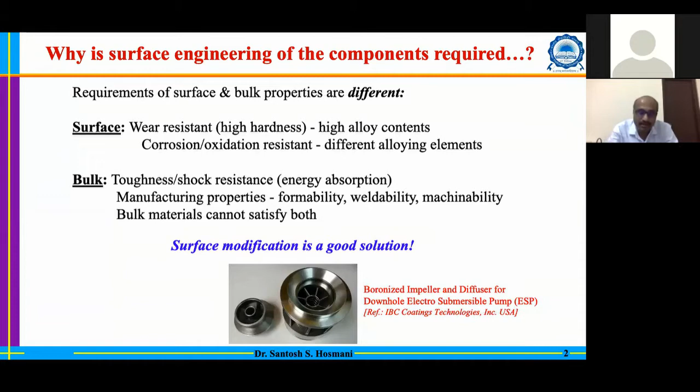At the same time, it may not be economical. Instead, we can start with cheaper material and find a way to change the surface property. That is why surface engineering is becoming very popular, especially nowadays.

There are various types of surface engineering techniques. One broad classification is that we can change the surface microstructure with respect to chemistry, or without chemistry. That is one approach, which we call surface treatment. Another approach is where we deposit a nobler material over the surface, which we call a coating technique.

So the current talk is basically related to surface treatment, where we are going to change the surface chemistry by introducing boron into the surface.

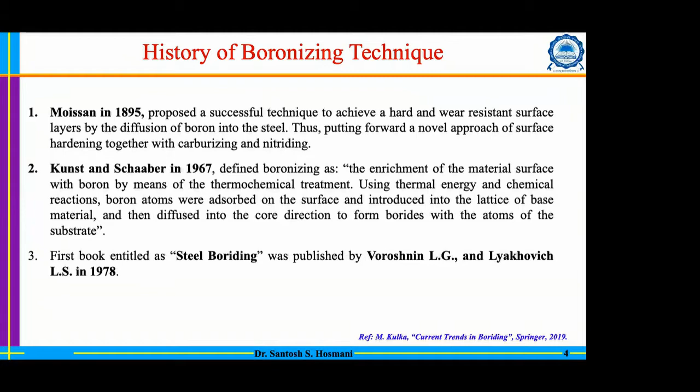The boronizing technique is quite old. The idea of boronizing was first proposed back in 1895, along with nitriding and carburizing. Since then, the science behind this process slowly gained sufficient understanding, and by the end of 1967 there was enough understanding about this process. Subsequently, there are many publications even till today in this area. However, the first book on boronizing of steel was published back in 1978, and since then we have plenty of literature available in this area.

Similar to carburizing and nitriding, boronizing can be done in various ways. One option is to use a solid medium, where due to elevated temperature some reactions occur that generate boronizing potential. That boronizing potential is useful to introduce boron into the steel surface, and not only steel, but even non-ferrous materials.

The solid media process is also called powder pack boronizing, which is very popular because of its low cost. Other options available include liquid media, though some environmental issues are associated with that, and gaseous media is also used for boronizing.

Other techniques like laser, plasma, ion implantation, and glow discharge are also available. People have explored these, and successful boronizing has been achieved using them.

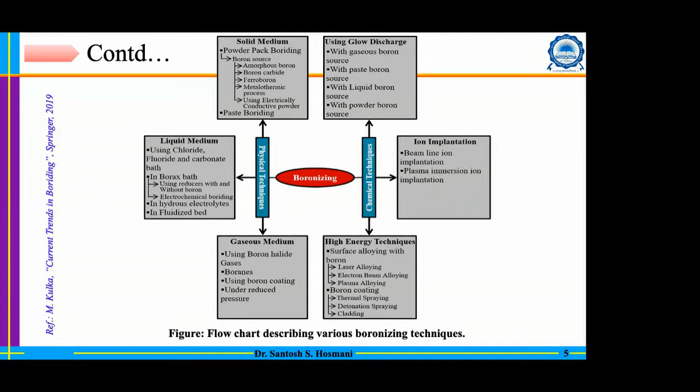However, pack boronizing is quite popular, and various industries are basically in the boronizing business. This business can be associated with supply of raw material, or industries that actually provide boronizing of various components. For example, from India there are a few companies, and across the globe also there are various companies involved in this boronizing business.

Now you must be wondering what materials can be boronized. In principle, you can boronize ferrous alloys as well as non-ferrous alloys. In ferrous alloys, basically all types of steels, even cast irons, can be boronized successfully. In non-ferrous materials, nickel-based superalloys are also boronized successfully, as well as cobalt-based alloys and titanium alloys.

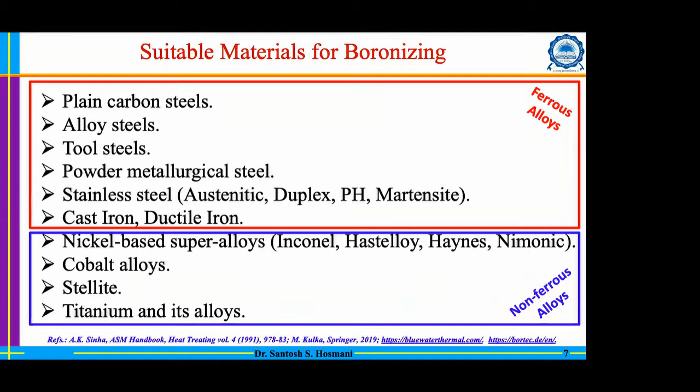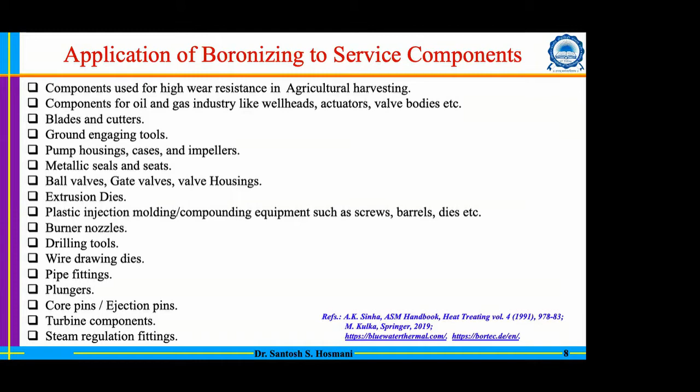From an application point of view, there are various components involved, mostly associated with agricultural harvesting related components, even oil and gas industry related components, blades, cutters, cutting tools, and dies and extrusion dies. So plenty of components can actually be subjected to boronizing, and these are just a few examples for your imagination.

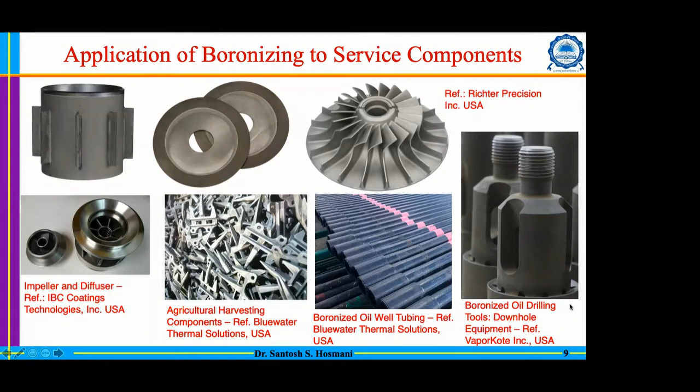These components have been successfully boronized as claimed by various companies mentioned here. You can see the impeller, diffuser, agriculture harvesting components, as well as boronized oil well tubing and drilling tools. These have all been successfully boronized, and people are using this technology widely.

In fact, the VaporKote industry has claimed that boronizing is a perfect solution, especially because it helps limit wear and tear wherever friction related issues are present, and it has very good resistivity to soil acidity, and it actually stops the redox reaction at the metal surface. That's why the boronized surface is quite suitable for that purpose.

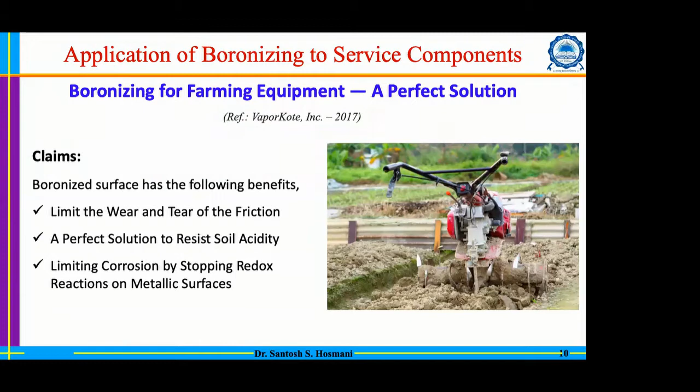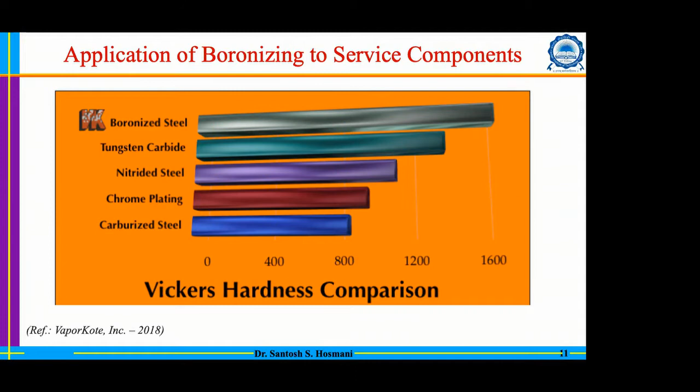The good thing is that whatever boronized layer forms on the steel surface, it will not be immediately detached from the surface, even though it is very hard. That is associated with some properties linked with that particular material, which I briefly explained during the presentation.

Now the boronizing, as you have already guessed, is basically a thermochemical treatment driven by temperature, and we need to have some kind of boron source there. That boron source will introduce sufficient boronizing potential, and then the boron will be introduced. Fundamentally we need to understand the iron-boron phase diagram, and unlike the iron-carbon and iron-nitrogen phase diagrams, the iron-boron phase diagram looks entirely different.

In case of the iron-nitrogen and iron-carbon system, you have sufficient solubility for nitrogen and carbon in austenite, but that is not the case for boron. If you see the solubility of boron in ferrite as well as austenite, it is extremely poor.

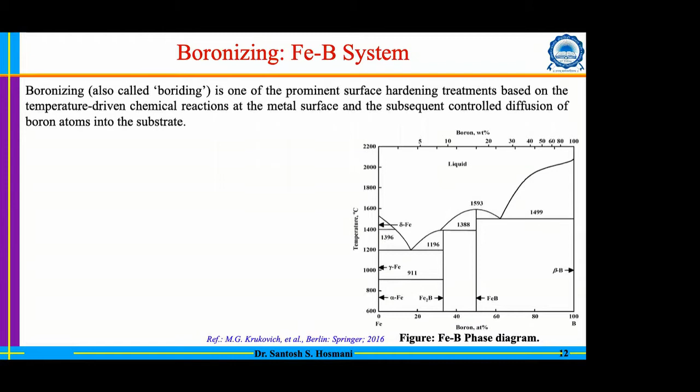However, there is a possibility of formation of iron borides, and two types of iron borides are generally formed: Fe-B and Fe2B. From the composition and stoichiometry itself, you must have guessed that the Fe-B layer will form at the top, and then subsequently the Fe2B layer will be there, followed by the non-boronized core.

Now, what are the properties which we need to understand? Because there is always a question whether it is better to have a single boride or single-phase boride layer, or a two-phase boride layer. To answer that, you need to understand especially the physical properties associated with this.

With respect to composition, whenever the boron content in steel exceeds roughly 9 weight%, there will be formation of the Fe2B phase. And whenever the concentration of boron exceeds about 16 weight%, there will be formation of the Fe-B layer.

If you see the crystal structure, Fe2B has a BCT structure, that is a tetragonal structure, and Fe-B has an orthorhombic structure. Their lattice parameters are entirely different from the lattice parameter of ferrite as well as austenite.

The lattice parameter for ferrite is roughly 0.28 nanometers, or in angstroms, 2.8. And in case of the FCC, it will be about roughly 3.5 something. So if you compare these lattice parameters with respect to Fe2B and Fe-B, they are entirely different. But still, this layer is quite intact during the formation process.

If you see density-wise, Fe2B is denser compared to Fe-B. And hardness-wise, both are having almost the same hardness, roughly about 20 GPa. Young's modulus is significantly different, and Fe-B is quite stiff compared to Fe2B.

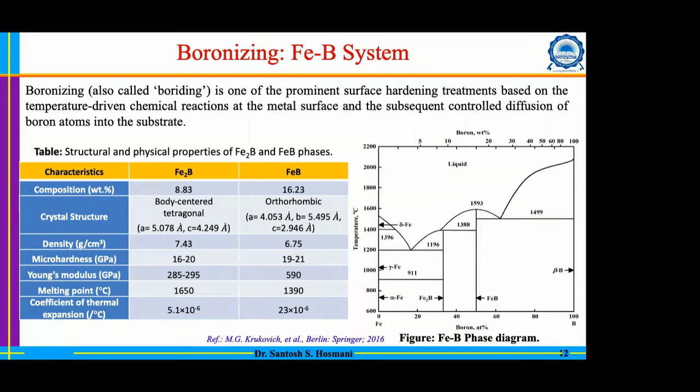Now another fundamental thing is that we need to understand the diffusion or migration of boron in both types of lattice, whether the open BCC structure or the close-packed FCC austenite structure. Similar to diffusion of carbon and nitrogen in ferrite and austenite, the diffusivity of boron in ferrite is relatively faster compared to austenite at a particular temperature, because the activation energy barrier for diffusion is quite high for the FCC matrix compared to the BCC matrix.

This matches well with the phenomena associated with carbon and nitrogen diffusion. Originally this diffusion concept was introduced in 1953, but that equation had some error and was later corrected. In 1995, the equation shown on screen was proposed, and people still use this expression. Importantly, as the temperature increases, especially beyond 600 degrees Celsius, diffusivity is not really much different in the ferrite matrix versus the austenite matrix.

So unlike the carburizing process, there is no requirement that you need to be in the austenitic phase region. In carburizing, we require austenitic phase because we have very high solubility of carbon there. But here that is not the criteria, because we have seen in the phase diagram that solubility is not really great in either phase.

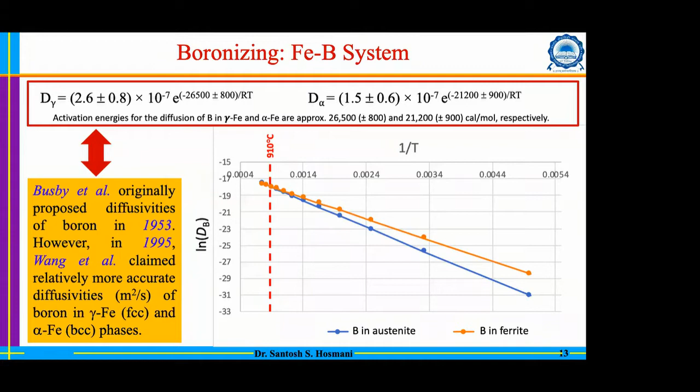So people have successfully boronized even at 800 degrees Celsius, and also boronized pure iron successfully. The only criteria is that high temperature helps us have effective chemical reactions happening at the surface, because these chemical reactions also have their own activation energy barrier. High temperature helps overcome that barrier, so your chemical reaction rate will be faster. That advantage you get due to high temperature along with high diffusivity.

Now I will talk about the pack boronizing method, which is the most economical method. What are the basic contents in that particular powder? There are three types of powders in that mixture: one is the boron source, the second is the activator, and the third is the diluent.

There is a wide range of boron sources available. People have mixed amorphous boron, crystalline boron, borax, even ferroboron. But B4C, boron carbide, is widely used by the commercial powders available, and activators are mostly KBF4, a halide type compound generally used as activator.

The role of the diluent is just to provide an inert atmosphere so that whatever environment is generated is pretty uniform surrounding the specimen surface. That's the role played by the diluent. Mostly people use SiC as the diluent, which is considered inert at boronizing temperature.

However, literature and also our own work observed that especially at elevated temperature, SiC actually forms a sticky layer on the steel surface, and that sticky layer is difficult to remove easily. You probably have to do some grit blasting or something to remove it, adding some additional cost. This happens whenever using very high temperatures, especially beyond 1000 degrees Celsius. Otherwise, SiC has no role in any reaction as such.

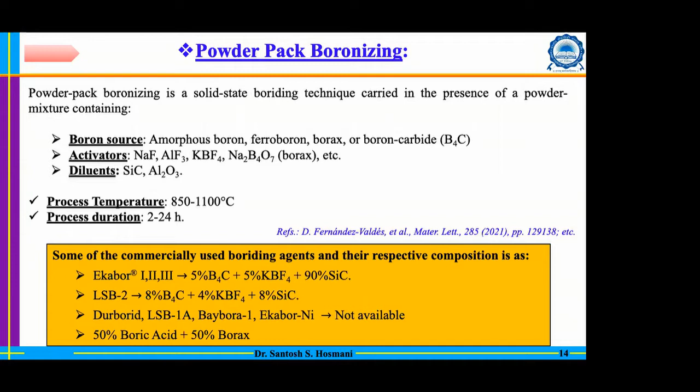Now the experimental setup. The experimental setup is pretty simple. You have the container, and the material for the container ideally is steel. Even you can go with mild steel, and stainless steel containers are also widely used.

Then in that container, you must adopt a particular mixing process. Whatever layer thickness you are putting for the boronizing mixture, followed by the alumina powder or even glass powder, whatever combination you select should be uniform throughout the process. Otherwise, it's very difficult to control the boride layer thickness, and you really cannot predict what will happen in pack boronizing. So you need to adopt a particular sequence.

What we actually used to do in our container: we have about a 20 millimeter layer deposited by this boronizing mixture, and we keep the sample over it. Then again we have a 20 millimeter layer of this boron powder, followed by the alumina powder, even silica, as well as glass powder.

The basic purpose is to avoid any kind of environmental contact with the boronizing mixture, because if you have oxygen trapped into this powder, that will lead to formation of porosities at the specimen surface. That creates a problem especially during application, because if the porous layer is on top, either you have to remove that porous layer or find a way to close those pores. If that is not done, in principle that's a disadvantage because cracking can occur easily, especially at the top layer.

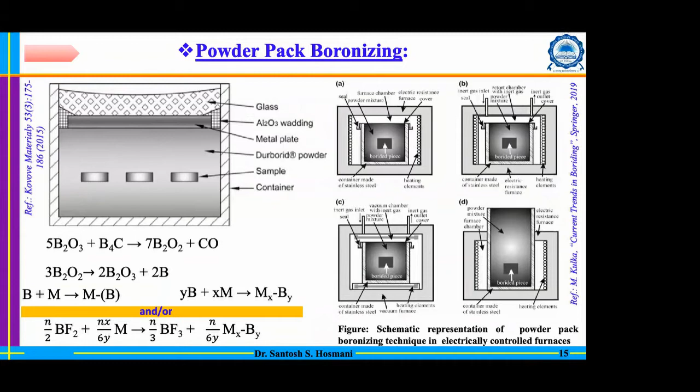Even your container can be a longer container, with only a limited portion exposed to elevated temperature. For example, with a shaft type component, only a limited region of that shaft may need boronizing. This is possible because chemical reactions occur wherever the temperature is sufficiently high, and only then will boron potential be generated; otherwise it will not be generated. This means a selected region can also be successfully boronized in this pack method. You just have to alter the design accordingly.

So now there are well-known 5 to 6 steps in this boronizing process in the physicochemical model.

You have the free boron coming from the atmosphere, and this boron potential depends on a lot of factors. One is the chemistry or composition of your boron mixture, as well as the temperature. Then there is adsorption of boron, and that adsorbed boron will react and form FeB and Fe2B. Now the formation of FeB and Fe2B depends upon the capability of the atmosphere.

If the boron potential is high, then there will be formation of FeB, otherwise it will not lead to formation of FeB, and you have only Fe2B. Then there is migration of boron across the interface of boron and compound layer, and finally these borides will grow. The growth morphology also depends on the crystal structure of these borides, which I will discuss later.

As you know, initially there is formation of Fe2B. Then subsequently, at a later stage of boronizing at the surface, there is consumption of Fe2B, and that leads to the formation of FeB. Obviously the system wants to grow both layers together, meaning FeB layer will grow together with the growth of Fe2B layer.

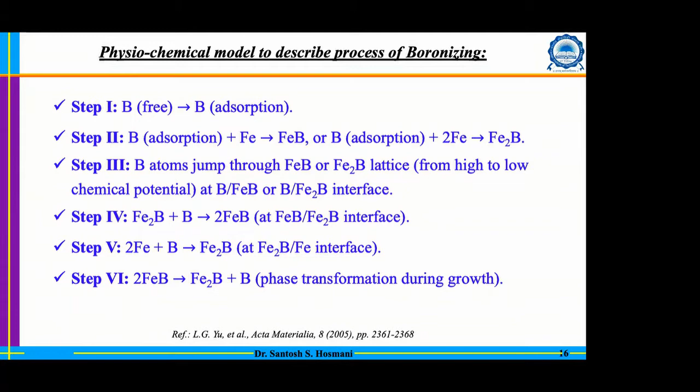That means at the surface, to achieve equilibrium between these two compounds, there is a possibility of some dissolution of FeB to Fe2B, or vice versa, Fe2B into FeB. So those reactions can occur at the surface during growth. This is the simple mechanism that people have proposed, and this is from our work.

What actually happens is initially there is formation of a compound which is boron rich, and that compound is neither FeB nor Fe2B. It is just a boron rich compound, and then there is nucleation of Fe2B, and it grows as a sawtooth morphology.

Again, that morphology depends on the composition of the steel. If you have low alloy steel or medium alloy steel, most of the time you have a sawtooth morphology of these borides, as people have observed. However, as you keep increasing the concentration of alloying element, your morphology will change. It will become a more smooth morphology than the sawtooth morphology. I will discuss that later, because it is also an interesting aspect we need to understand.

Then subsequently, you can see there is some transition zone shown here. What exactly is a transition zone? Whatever alloying elements are present in the steel, not all will be accommodated into iron boride. Some elements have limited solubility in iron boride, and some elements do not have any solubility at all, meaning they are entirely rejected by these borides and accumulate at the front of the borides, forming a transition zone.

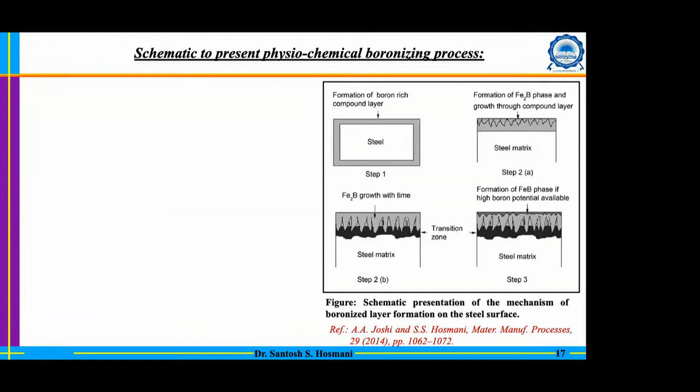Many times that transition zone will alter the mechanical property, and that alteration may be disadvantageous, so we need to understand that transition zone concept, which we will discuss later. Finally, you have simultaneous growth of three important layers: the transition zone, Fe2B, and FeB. That is the typical cross section.

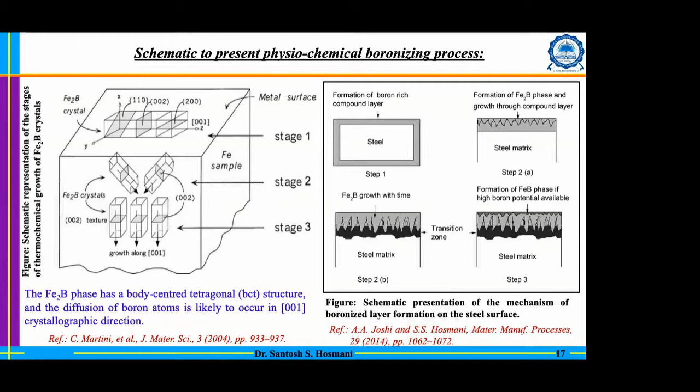Now why is this sawtooth morphology observed? What people propose is that Fe2B has a tetragonal structure, and boron diffusion generally prefers to migrate, or the boride prefers to migrate, along the 001 direction by stacking the planes of 100 and 110. So these planes stack in the 001 direction, and because of that we get the sawtooth type of morphology observed in most cases of steel.

Now, as I mentioned previously, why we don't want to have two layers together - here is an example. They have studied AISI 304 steel, and you can clearly see in the microstructure there is formation of Fe2B as well as FeB. Looking at the nanoindentation study, they mention the hardness profile as well as the residual stress profile.

Here you can see figure E, the residual stress profile - let me just use a laser pointer. So in the residual stress profile, you can see that...

So here you have the tensile nature, especially in the FeB layer, that is the top layer. Top layer FeB has a tensile nature, and Fe2B has a compressive residual stress. Now this tensile nature is definitely not desired, because that can easily initiate cracking. And since these two layers have different crystal structures, the coefficient of thermal expansion is also different, so there will most likely be very weak adhesion between the FeB and Fe2B layer. That means there is a possibility that the FeB will be detached during operation.

The nature of this stress is very much dependent on process parameters. Here they studied at a constant temperature at different times. Initially, when time was quite less, at 2 hours, the FeB layer had almost a compressive residual stress. However, as time progresses to 10 hours, that residual stress nature changes from compressive to tensile. This happens because of the growth of the boride layer, and there's a difference in their crystal structure. Ultimately, that will enable it to withstand the stress generated simultaneously in the FeB and Fe2B layers.

The properties of the FeB and Fe2B layer depend on the elastic strain - that is, the capability of that boride layer to accommodate the elastic strain generated due to residual stress mismatch. Because whenever there is formation of the Fe2B layer on the substrate, which will be ferritic or austenitic during boronizing, there is a lattice parameter difference. But Fe2B has some flexibility, and the elastic strain is sufficiently high there, so whatever mismatch exists, the system is able to accommodate it. That's why very good adhesion of the Fe2B layer is observed, especially in case of boronized steel.

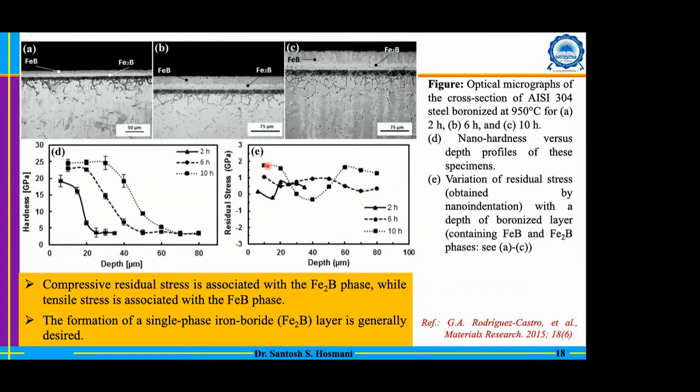Now another important aspect is the composition of the ferrous alloy. This is a very complicated concept, especially in boronizing, which is least understood. During boronizing of ferrous alloys, various compounds and elements have a different response. For example, elements like chromium, aluminum, silicon restrict boride growth. However, elements like cobalt, nickel, manganese don't have much effect on restricting boride growth. This restriction is basically associated with mostly the binary system. But in reality, with the presence of multiple components, the behavior of these elements becomes entirely complicated and may not behave as shown here. Broadly speaking, carbon, silicon, aluminum, chromium restrict boride growth, while manganese, cobalt, nickel don't have much effect on boride growth.

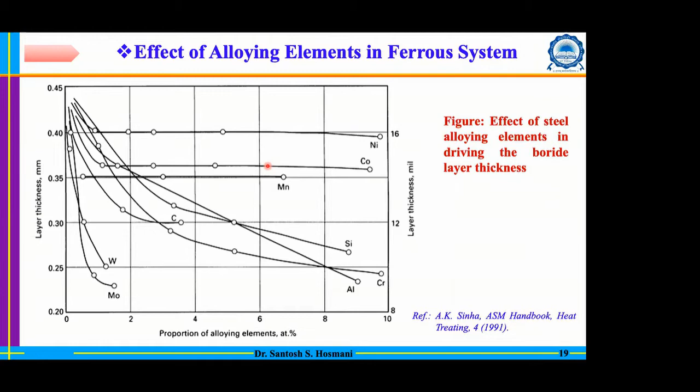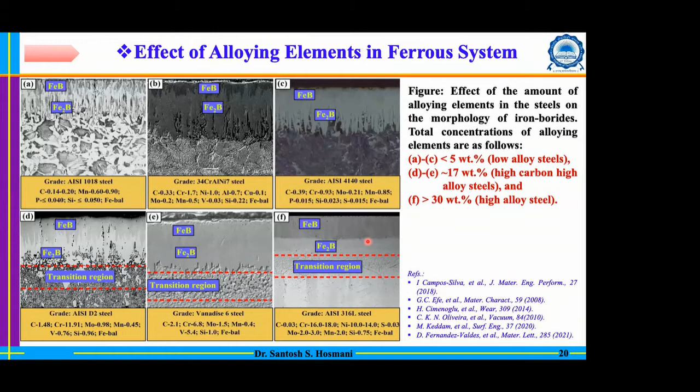You can see the interface between Fe2B and the transition zone, as well as FeB and Fe2B, is quite smooth in nature. That means the morphology of these borides is significantly dependent on the concentration of the alloying element, apart from its effect on the migration behavior of these borides. These two important effects basically govern the morphology of these iron borides.

This is ultimately very important, especially with respect to the mechanical properties of this layer, so I will quickly discuss it. We need to understand the microstructural aspect and the role of these alloying elements during the growth of these borides. That was our main motivation for the study. So what actually did we study here?

We started working on this topic in 2013 and extensively did a lot of experiments, varying the container as well as the boronizing parameters like temperature, time, everything. We got some interesting results there, which we will show initially.

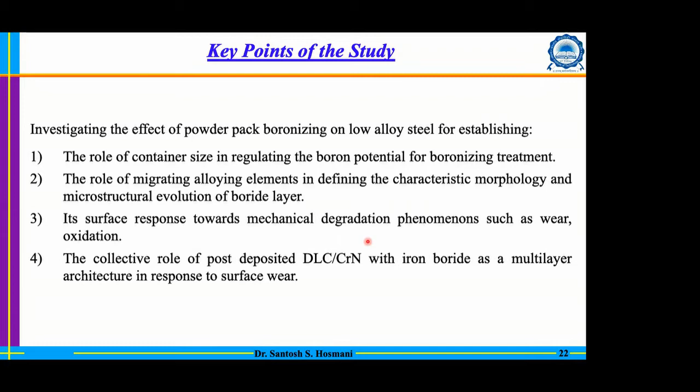Then we will slowly migrate to the more scientific aspects related to the migration of the alloying element - a typically complicated aspect which we proposed during our study. Finally, we talk about the mechanical aspects using various techniques, including oxidation and wear, and then whatever lacunas are associated with boronizing, how we can tackle that using duplex treatment, like a post-treatment. So that we will discuss quickly.

Now, the pack boronizing process optimization has been done, and in process optimization, I will show basically two types of steels we have used: one is AISI 4140 and the EN41B steel.

We have performed experiments at different conditions. Our main intention is that these two steels have wide applications, and these elements' concentration is quite less in this particular steel. We want to understand this material more in depth, so that's why we selected these two alloys here.

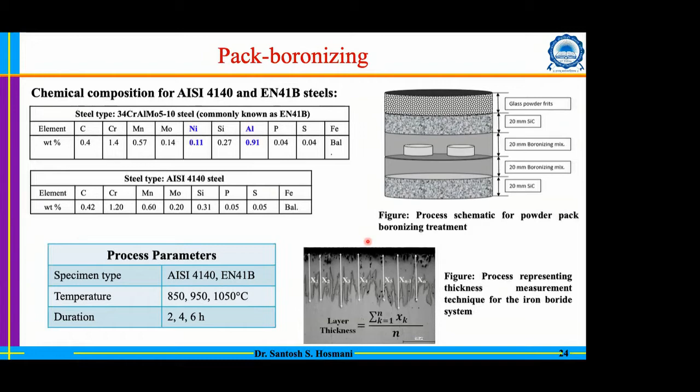These are basically the literatures we'll find on this topic. And here, as I mentioned earlier, we initially used three different types of containers: a small container, medium sized container, and large container.

The material of the container is steel - it can be stainless steel or even mild steel. You have to remember that during boronizing, your container will also consume the boron potential which is generated, and you have to take care of that most of the time. That's why people used to pre-treat the container itself first, so that the consumption of boron potential by the container will be minimum. However, some consumption will always be there.

Here you can see the effect: in case of a small container, boron potential will definitely be limited because the quantity of powder is less there. In this case, we have not found any kind of boride layer as such. This layer is something like dominated by a porous layer which forms there, and there is no boride layer in figure A.

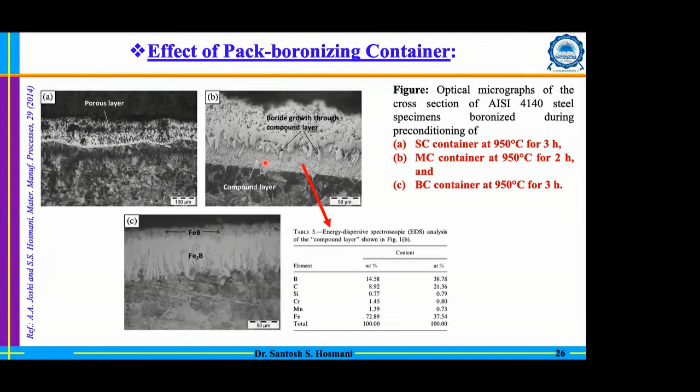In figure B, we have about 2 hours, temperature same in all cases. There we have seen compound layer formation, and by using EDS chemical analysis, it shows very high boron as well as carbon content there - that rich content is there. The hardness value shows a slight increase: core has about 300 HV hardness, and this compound layer has about 400 HV hardness. But this is not really the boride layer, because boride layer typically has hardness greater than 1200 HV. So that is not really the category of boride, but a compound layer forming initially.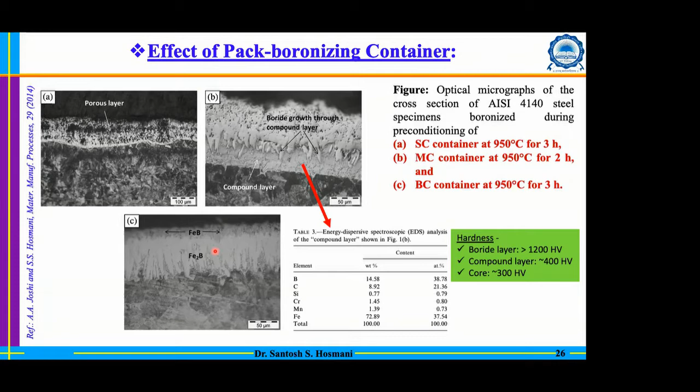Here you can see the sawtooth morphology actually emerging in this compound layer. As you keep increasing the time, and use a bigger container where boron potential is also high, you can get the well-grown FeB layer as well as Fe2B layer. That means your container size and the amount of powder with respect to the surface area of your material component is also very vital in governing the kinetics of your process. So that is also something we need to understand.

And here is another interesting thing: in case of a medium container, we are not seeing any kind of FeB layer formation.

We were curious to understand what exactly this transition zone is, so we did some investigation. We realized that this transition region is basically associated with enriched elements which are rejected by the boride, and these are forming undesired compounds in the transition region. Because of that, this particular region has a different property than the matrix as well as the compound layer.

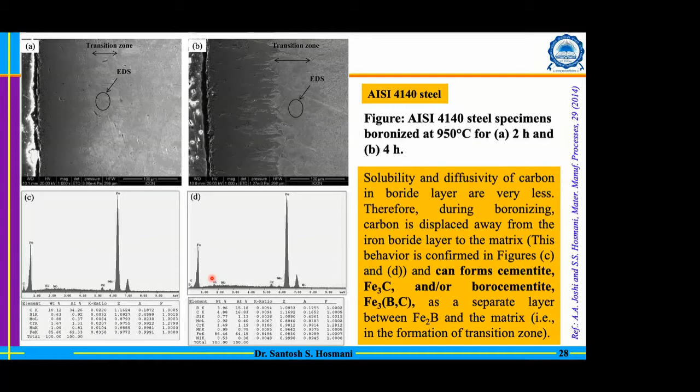In this case, we have observed enrichment with respect to carbon, and we also have indication of boron there. That means there is a possibility of formation of cementite, or borocementite. Because of that, the properties are different compared to the matrix as well as the boronized layer. So now the basic mechanism is very clear to understand for us, and this is what I already explained.

The nature of the transition zone is basically rejected elements. In this case, we observe carbon, however, other elements are also there.

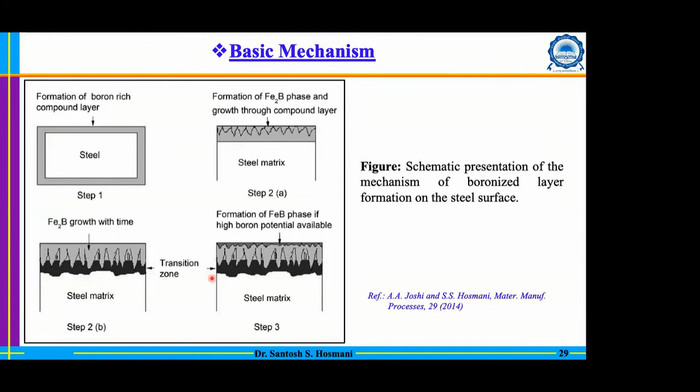At that time, in 2014, this paper was published, and we were unable to have much characterization there, so we were unable to understand this particular concept in more detail. Later on, we focused more on understanding this.

We selected another category of low alloy steel, the EN41B steel, and did experiments at various temperatures and durations, then subsequently investigated this.

Now, in this case, the optical micrographs show an interesting phenomenon. All are taken at the same magnification except figure B, and all are exposed to 4 hours of boronizing, only temperature is different. If you notice, at a low temperature of 850 degrees Celsius, the boride morphology,

if you compare figure B, which is an amplified view of figure A, with figure D, you can see there is a significant difference in their appearance. In case of figure B, the borides are very thin in nature and very sharp in appearance.

However, at very high temperature, 1050 degrees Celsius, these borides are not really very sharp, their tips are blunted. And if you go to the lower temperature, 950 degrees Celsius, the tips are very sharp again. That means the boride morphology is significantly dependent on temperature.

And this particular phenomenon, you can also see surrounding the boride, there is some kind of different contrast appearing, different from the matrix. And why is that contrast there? That is because of the different chemistry of that particular region.

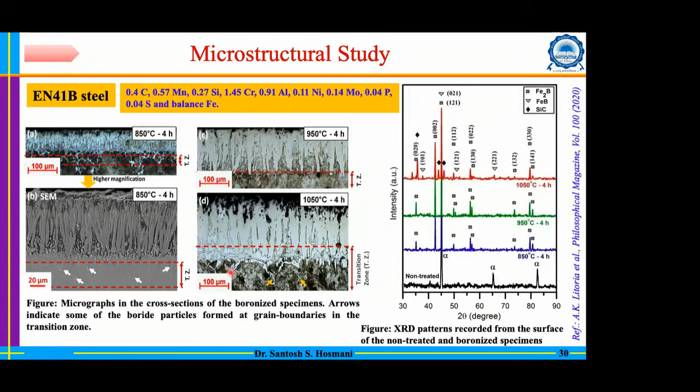We call this particular region the matrix. So we have used the word boride columns, then the matrix, then the transition zone region, and then the core region. These are the terminologies we have used in this particular case.

So now, before delaying much, I will just go to this particular hardness depth profile. You can see that the hardness depth profile is significantly lower for the case of 850 degrees Celsius compared to that of 1050 degrees Celsius.

You may be wondering, because in case of 850 and 1050 degrees Celsius, both cases we are getting the iron boride compound, but why are the properties different? Actually, if you notice carefully, at very high magnification, there are open gaps, especially look at figure number B.

These open gaps are nothing but the matrix, meaning that region has not been transformed to boride yet. You can even see this matrix there even up to the surface. That means you still have a trapped matrix region which is unable to transform into boride entirely, and this situation is aggravated, with the proportion of matrix increased, at a lower temperature.

That's why whenever we take an indentation, you're getting information from boride as well as from the matrix. That's why you're getting very low hardness or least hardness at 850 degrees Celsius. However, at elevated temperatures, the matrix region is entirely consumed by the boride, so that region will have only boride. That's why during micro hardness measurement, you're getting information only from the boride, and that's why your hardness is very high there.

So in principle, bottom line is that you have a mixture of the boride as well as matrix, and we use the fraction of boride and fraction of matrix, which equals 1. That simple concept we have adopted here from this particular slide.

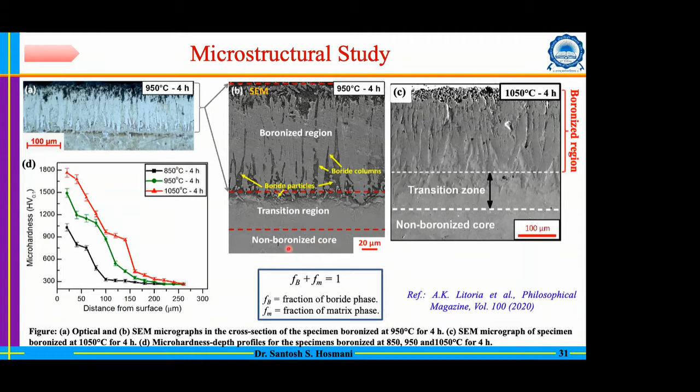So you just imagine the process from the core to the surface. In the next sequence also, I will imagine this in the opposite sequence. Whenever I show the chemistry of this region, there also we are imagining from the opposite sequence.

Now here you can see an enlarged view. You can see that the bigger size boride columns are formed by clustering of thin boride columns, which happens during the growth process. And you can still have some trapped region, which is the matrix region. You also have the formation of defects, especially near the surface region, and these defects are mostly porosities.

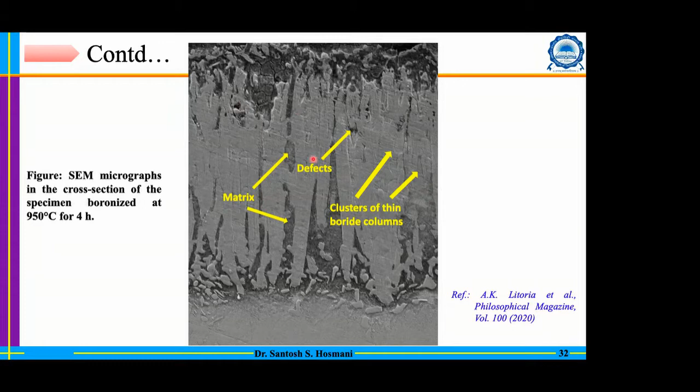Now the EBSD, that is electron backscatter diffraction, helps us to understand the orientation of phases as well as which phases are forming there. And we have confirmed that basically you have the stacking of 100 and 110 planes in the direction of the 001 crystallographic direction. So that is pretty well confirmed here.

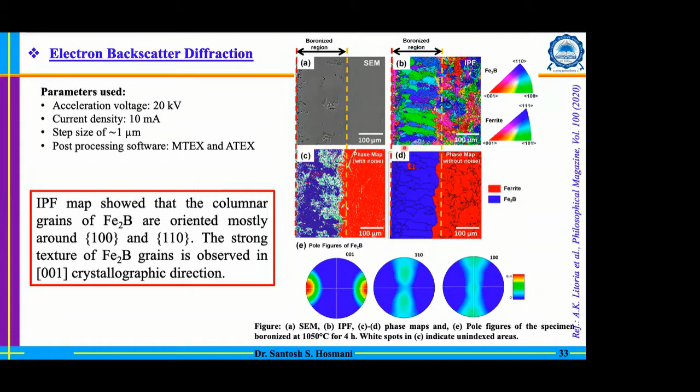And apart from that, you can see in this particular region, near the surface, you have very fine grains visible, and then subsequently there are columnar grains visible. That means in this boride region, you have two important regions: the small grains and the columnar grains. And then subsequently we have a transition zone, and then you have the core.

And why are those fine grains forming there? Most likely, whatever matrix is left between the two boride columns is transformed at a later stage into tiny boride, but they are unable to grow because they are already restricted by the well-grown boride columns. So that's why they remain as very fine grains there.

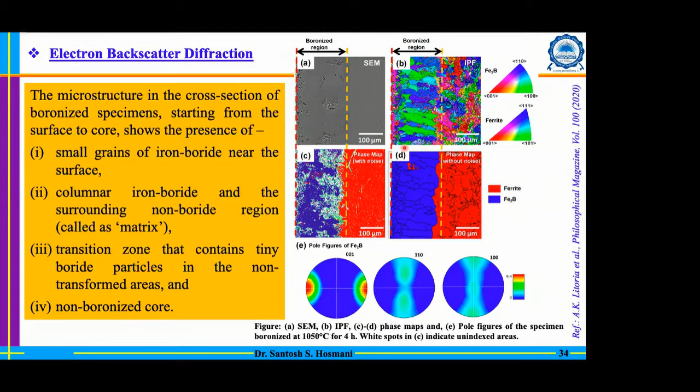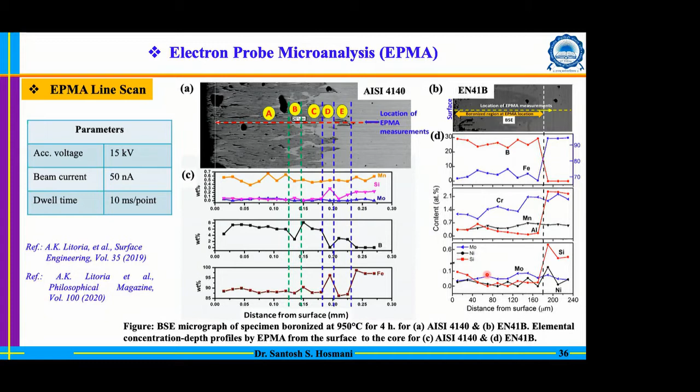However, other elements like chromium, manganese, even molybdenum and nickel, have some solubility in boride, but that solubility is not the same as in the matrix. That means during the growth of boride, elements will be rejected—that is for sure. All elements will be rejected to some extent; some elements will be accommodated into the iron boride, however some elements are entirely rejected, like aluminum, silicon, and carbon. However, other elements will be accommodated to some extent, but some portion is also rejected.

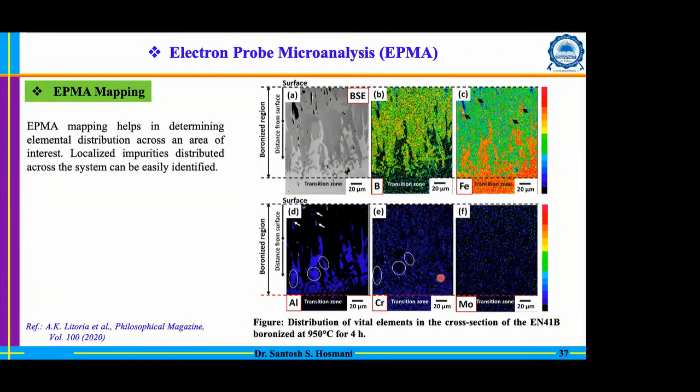For that purpose, we have investigated the glow discharge optical emission spectroscopy, that is GDOES. I will not go into detail because this is a very complicated analysis we did. What I want to mention is that the left-hand side image is for 950 degrees Celsius, and the right-hand side result is for 850 degrees Celsius, both at a constant boronizing duration.

Here you can see that this entire region is divided into different zones, and if you compare them, the nature of these zones appears more or less the same. That means it's not just by accident we got this particular profile; the system is really following some kind of mechanism here, and that mechanism is consistent. I will also show you different durations, and there too it follows a similar trend. That means something is happening with respect to the migration of the elements and the growth of this particular boride, and we need to understand that.

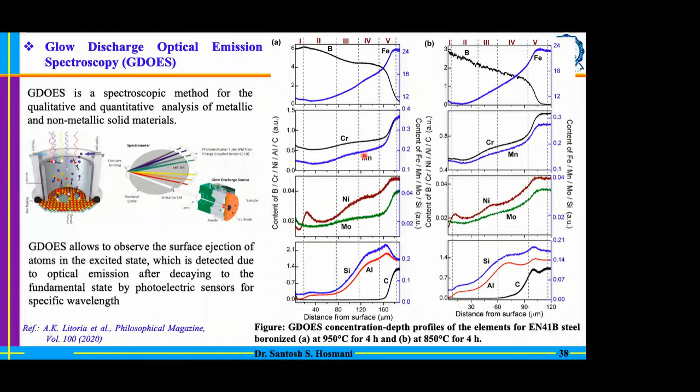For that purpose, we took the slope of this particular profile and wanted to understand how the slope varies. Here is the slope variation. For the boron profile, look from V to I, that means from core to surface. There is a decrease in the slope, and then it again migrates toward zero slope. That tendency is there, and it is aggravated at elevated temperature, that is 950 degrees Celsius.

What does zero slope mean? It means there is a stagnation of the boride column, it is unable to grow further. Why is that stagnation there? That is because of the accumulation. If you compare the boundary line between zone 3 and zone 5 with respect to aluminum and silicon, you realize that something is associated with aluminum and silicon segregation in the matrix, and that was also confirmed in this particular analysis.

For that purpose, we took a mathematical interpretation. The simple interpretation says: you have a total concentration of an element at any depth, which is basically a combination of the chemistry of the boride as well as the chemistry of the matrix, along with the fraction of boride and fraction of matrix. A simple lever rule has been applied here. We interpreted this phenomena, and the outcome is that during boride growth, there are two categories of elements. Some elements are entirely rejected, I call them set number 2, and the elements which are accommodated into the boride, I call that set number 1.

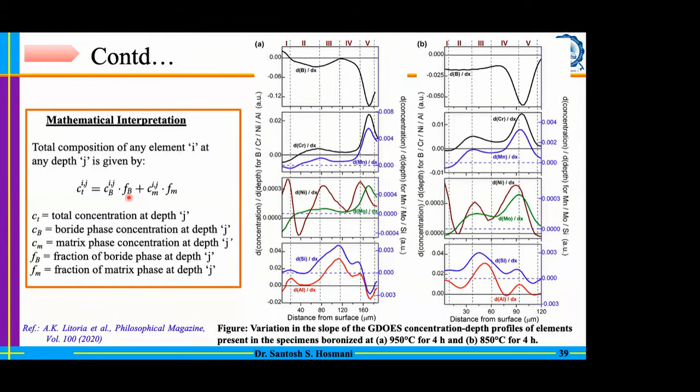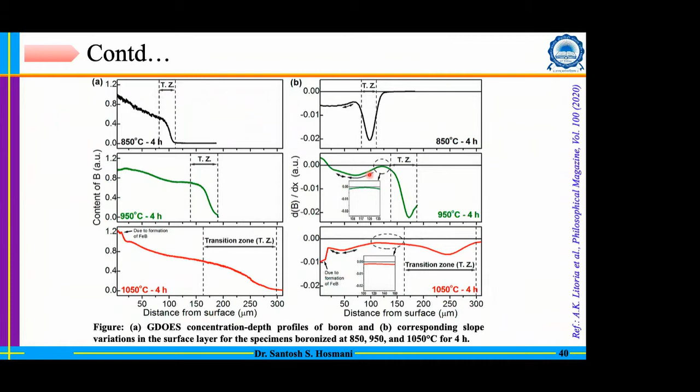In case of aluminum and silicon, you have two types of migration: one in front of the boride, the sawtooth boride, and one between the borides, that means in the matrix. The migration kinetics in front of the boride is less severe, it is able to migrate at a fast rate. However, the elements accumulated between the boride columns are unable to migrate at a faster rate, and that is causing the restriction in the growth of this boride layer laterally.

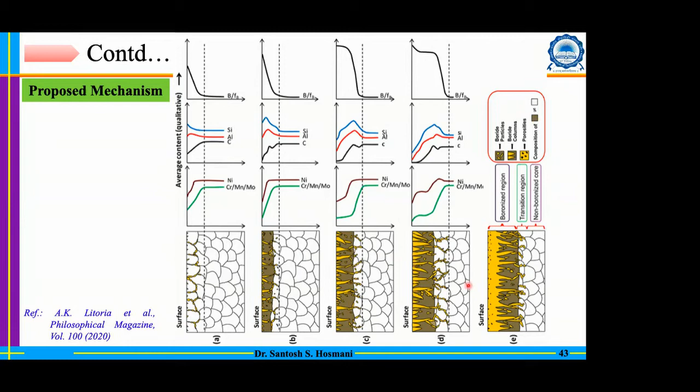So now we have refined our understanding with respect to the mechanism, and we have proposed the matured mechanism here, correlating the migration of elements with the nucleation and growth of the boride. Figures A to E show how this phenomenon happens during boronizing. Initially at the grain boundary there is boride formation, and growth happens in a columnar fashion. During that, rejection of elements happens, which changes the chemistry of the matrix. You can see a grayish region here compared to the non-boronized core. Then finally you have the simultaneous growth of the transition zone as well as the boride columns, that is how the layer matures.

Okay, so now let me check how much time I'm having, depending on that I will decide what rate I have to finish. How much time can I have? Ten more minutes. Oh yeah, sure.

Okay, so now we need to understand the properties. For this we recently did an investigation using nanomechanical study. Why did we adopt nanomechanical testing? Because with nanomechanical methods we can get a localized understanding of properties, which is crucial because let's say your boronized component is subjected to wear. Whenever wear happens, material loss will occur, and fresh material will be exposed. That means the properties of that region are entirely different than the previous situation. So we need to understand the local distribution of these different phases and their chemistry, and how that plays a role in the localized mechanical properties.

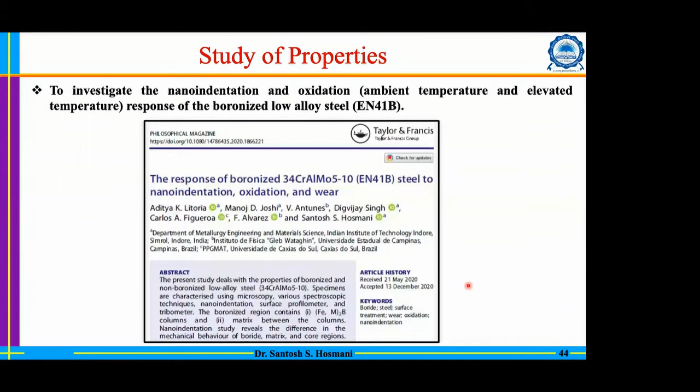For that purpose we did a nano indentation study. What we observed is that borides are definitely harder, which is well reflected in the table here, and the modulus of this boride is basically high, which is obviously expected. Compared to the matrix, that is the region surrounding the boride, and the core region, that is the non-boronized core, the E value, the modulus of elasticity, is definitely high for the boride, which is obvious.

Now the question arises, if the material is very stiff, there is a possibility of cracking during growth. Fortunately, if you look at another column here, the H by E ratio, this gives us information about the elastic strain. Even the HF by H max is linked with that. You can see that the elastic strain, the H by E ratio, is very high compared to the matrix and even compared to the core.

That means even though that boride is stiffer, it still has a capability to absorb any kind of lattice mismatch elastically. That's why if you look at the adhesion test, it confirms that this boride has very good adhesion. So there is no issue of cracking or detachment of this boride during application. That is unlikely to happen. That is the best information we got.

And the matrix has definitely different properties, because of segregation of elements. Whenever there is loss of material and fresh material is exposed to the surface, your surface has the boride as well as matrix, which have different properties. Even though some regions appear boride-free, their properties will still be different because of segregation of elements. Depending on the chemistry of your alloy, you will have different properties of this matrix, and the response during application will also be different.

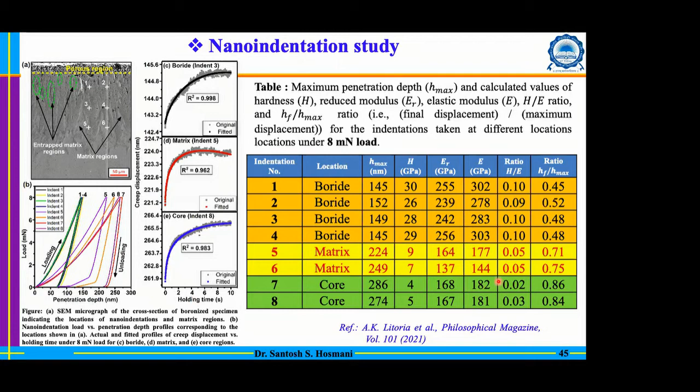Why is strain rate sensitivity useful for us? During application, we may have different sliding speeds — sometimes slow, sometimes faster. Higher the strain rate sensitivity, there is a possibility that the rise in hardness due to strain hardening phenomena will be there, and that helps us improve wear resistance. We have also observed this during our wear study at different sliding speeds. So this high strain rate sensitivity of the boride is advantageous, especially for tribological applications.

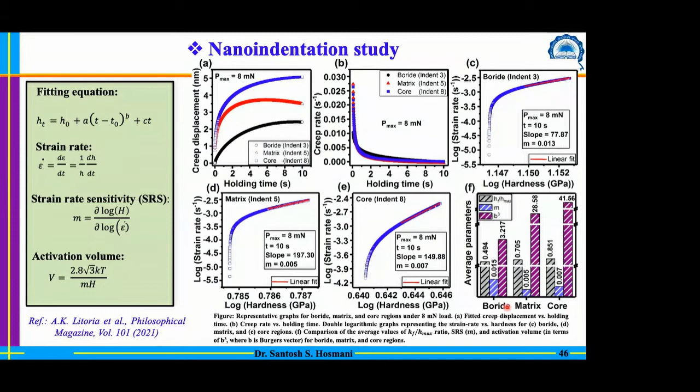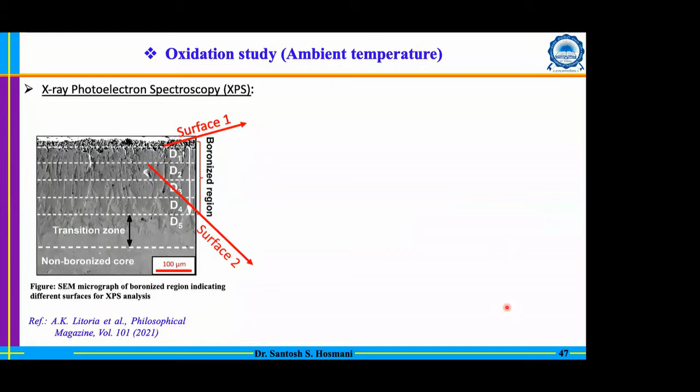Now we also studied the oxidation resistance, removing the layer by layer. We wanted to understand, after deterioration of the surface, how the fresh surface would react with ambient temperature. For that purpose we removed layer by layer and took XPS, X-ray photoelectron spectroscopy. This XPS gives us the chemical information of the elements at different depths, helping us understand how the oxidation response occurred.

Your oxygen level at the surface increases — meaning more oxides are forming at the surface because of less quantity of boride. That is obvious because iron is already bonded with boron near the surface, so less iron is available in the matrix to react with oxygen. That's why we have fewer oxides at the surface, but as you go interior, more oxidation happens. This means the boride has very good resistance to oxidation even at room temperature. That is confirmed from this.

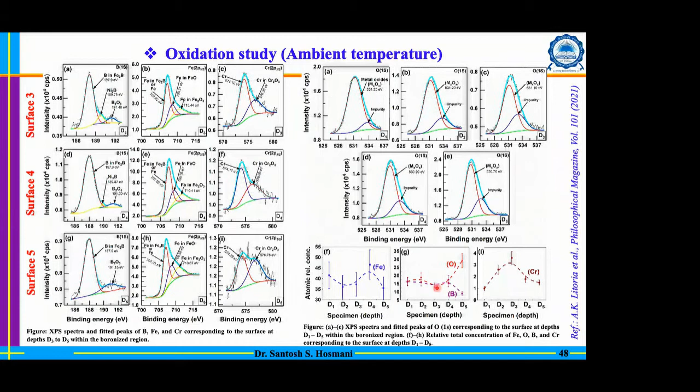Why is that so? Using XRD, we studied this composition and realized that during oxidation, various oxides form. Some of the boron oxides have a lower melting point, so they spread and cover the entire surface. That iron boron oxide, shown in the XRD pattern, uniformly covers the surface, helping to avoid further oxidation at elevated temperature. That is the mechanism helping us.

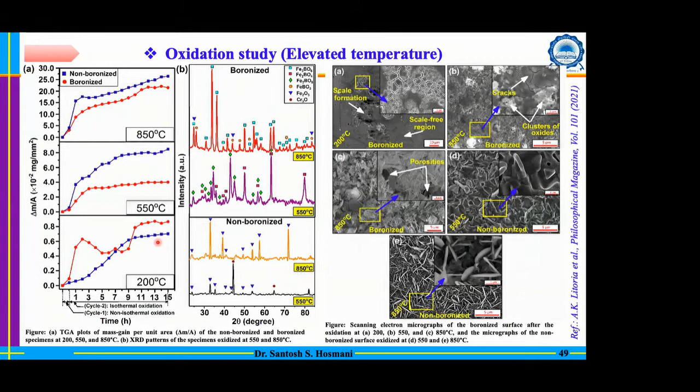However, at 200 degrees Celsius, you can see some erratic behavior, linked with the porosities formed at the surface. That means we need to address the bad quality surface, especially in the case of boronizing. That is a challenge, particularly for the lower temperatures.

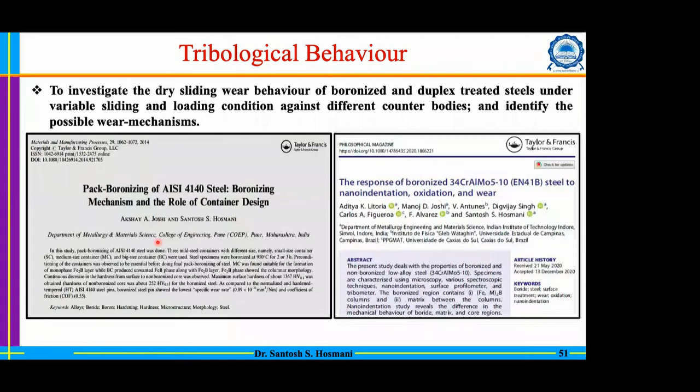Now the tribological behavior. We did an extensive study comparing the boronized surface with normalized, hardened and tempered, and nitrided conditions, and we also applied subsequent coatings. Our counter surface was also varied: initially a hardened AISI 4140 disc, an alumina ball, and a DLC coated surface. A wide range of combinations was studied to prove how boronizing will be useful.

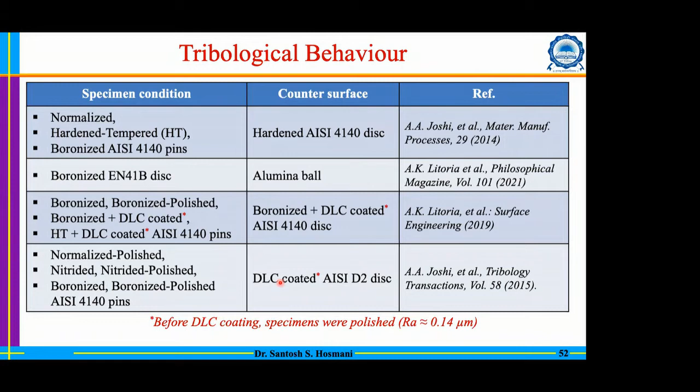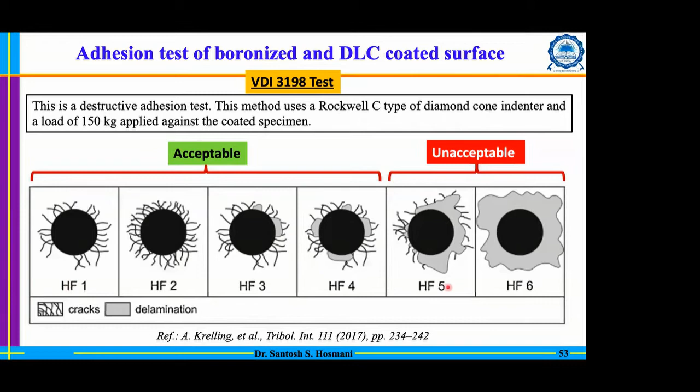Before going further, I'll give a quick adhesion test. It's a simple test using the VDI 3198 test, which determines adhesion on different scales from HF1 to HF6. Generally, HF5 and HF6 are not desired; up to HF4 is acceptable. In the case of a boronized surface, it lies at HF3.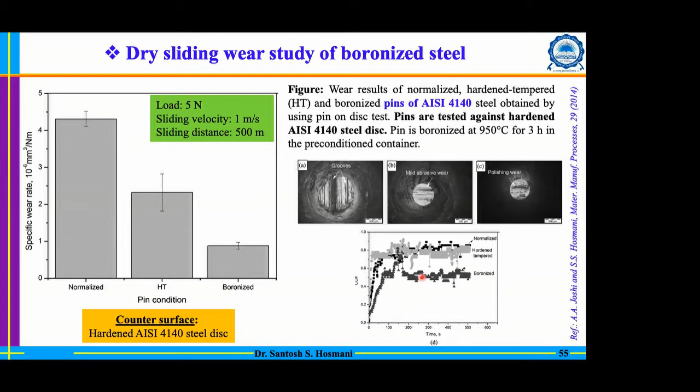Even on the right hand side graph, the coefficient of friction is also very low compared to normalized and hardened-tempered conditions. However, it cannot really be called extremely low because it is still about 0.5, which is a really high value. We are not really happy with this coefficient of friction. We get a very good improvement with respect to material loss, but the coefficient of friction is not great. For that purpose, we needed to see the effect of DLC coating, and that was our motivation to go with DLC coating, which actually helps us.

Due to lack of time, I'll quickly run through the crucial information. We did the boronizing wear loss study at different sliding speeds. In the table, the wear volume conducted at 0.5 meter per second sliding speed versus 0.3 meter per second shows a ratio less than 1, meaning at higher speed the material performs very well. This gap in wear behavior keeps increasing as the load is increased.

That means, in fact, your material is behaving very well at a very high speed compared to that of the lower speed. And that is probably linked with the SRS, it is a strain rate sensitivity. That is what actually we expect.

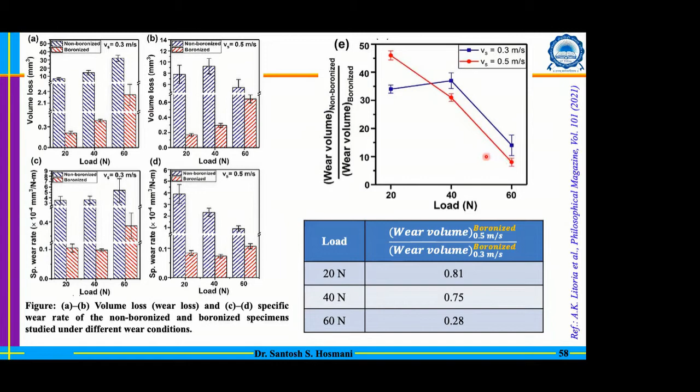Obviously, the top graph is not really giving us good information about the boronized surface. What it says is that initially, the difference between the boronized volume with respect to the non-boronized surface, you will actually lose the advantage associated with the hard surface as you keep rising the load. But still, at very low load, boronized surface is behaving extremely well. The difference between wear volume for non-boronized versus boronized is about 45 times better. However, at higher load, it is only about 10 times improvement with the boronized surface. But still, that 10 times is not really a bad value, so it's really good in that regard.

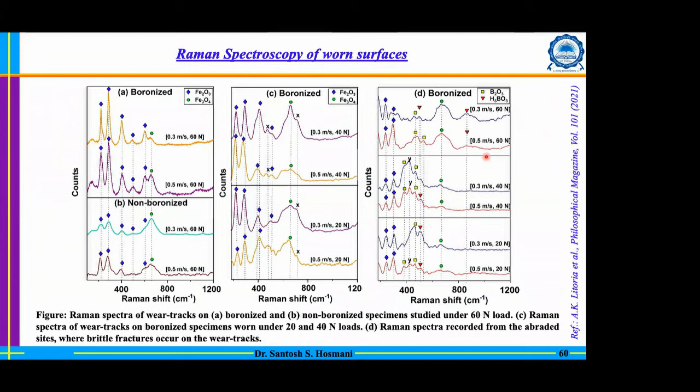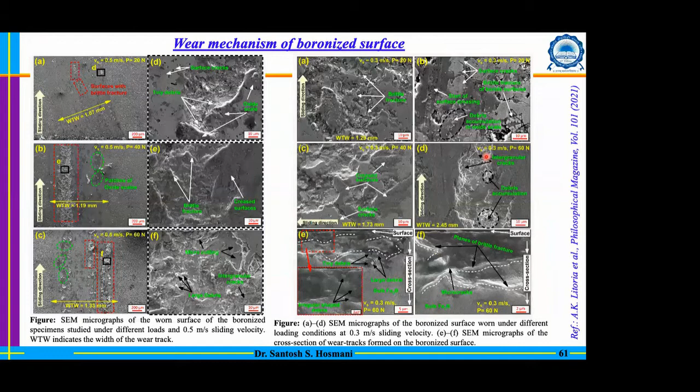Now, coefficient of friction is still very high, 0.4 to 0.5, so it's not really good. The wear mechanism we studied shows mostly cracking and oxidation. These two phenomena are dominating, and that is causing the loss of material generally. During sliding, there is oxidation of the surface, and that oxidation debris is actually causing further wear of the boronized surface.

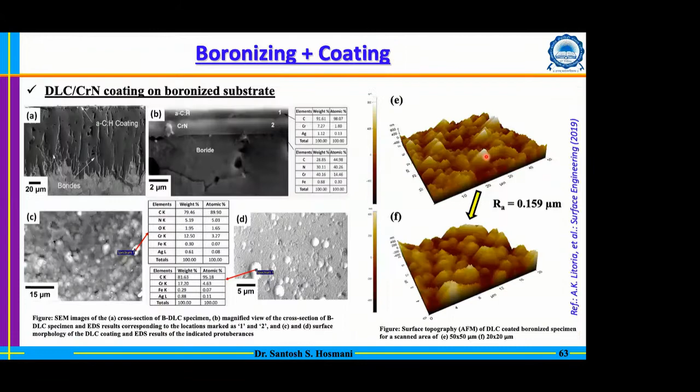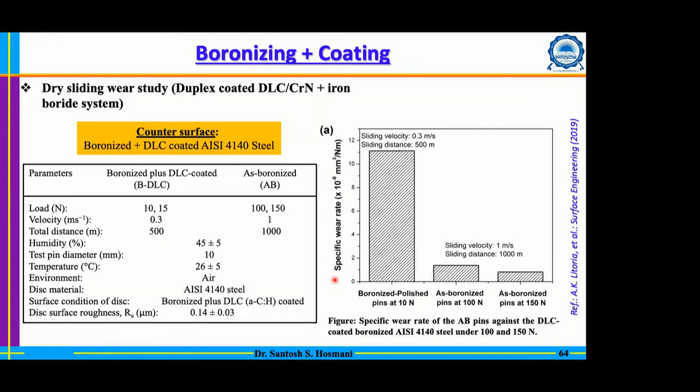Now I will show the DLC coating. Either of the surfaces is DLC coated, meaning the counter surface and/or the boronized surface. In that case, your wear performance is extremely good. Even at a high load of 100 Newton or 150 Newton, it performs very well. Because of the DLC coating, your coefficient of friction is also very, very low compared to earlier, you can see the value is 0.09 or even close to 0.1. It's an extremely good value you get by using the DLC coating.

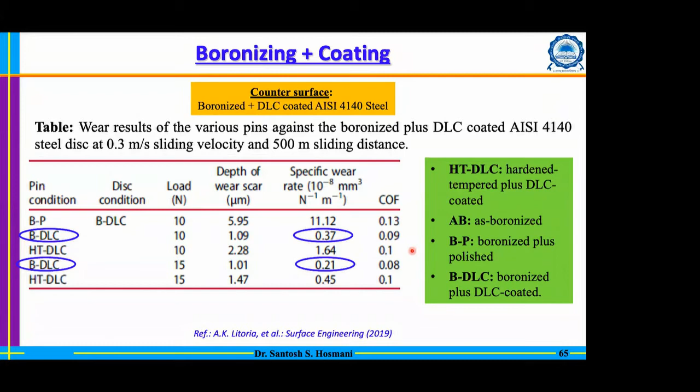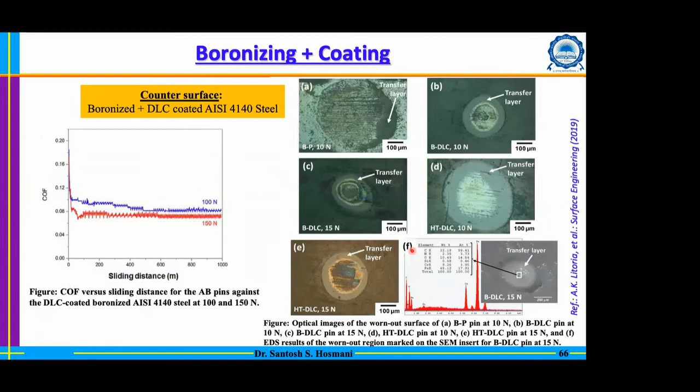So what is the reason? Basically, as you keep applying the load, there is formation of a transfer layer. It is a graphitized layer, and that graphitized layer is helping to reduce the wear loss as well as reduce the coefficient of friction. That is the basic mechanism happening because of the DLC coating.

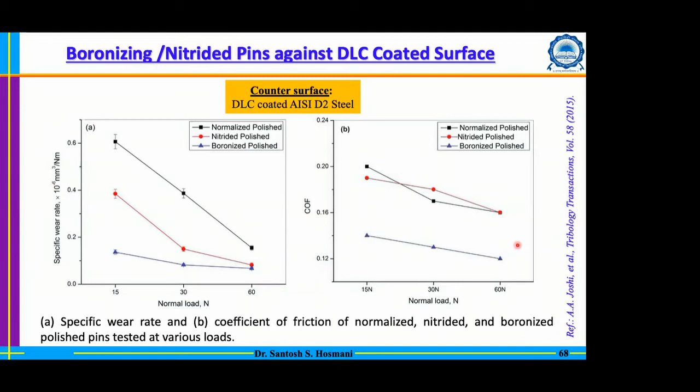So this same thing is actually mentioned here, and you can see that your performance keeps on improving as you keep rising the load. That is the beauty of DLC coating, because as you rise the load, you have more and more transfer film, that is a carbonaceous film, forming at the interface, and that is helping us improve the property.

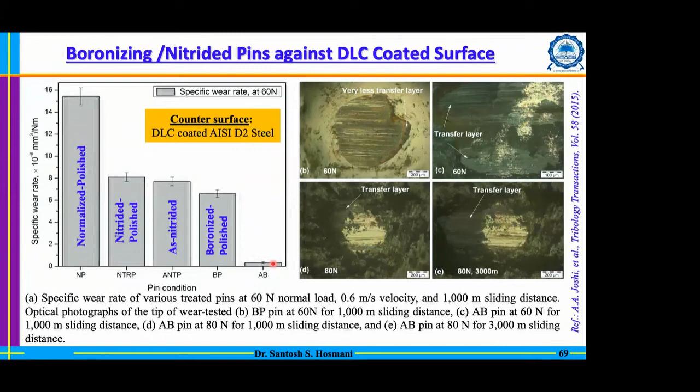This comparison with respect to your nitrided sample as well as normalized sample shows that AB pin, that is boronized surface, against the DLC coated D2 steel, behaves extremely well, especially for this particular situation. That means if you are using a DLC coating, better not to polish your boronized surface, better to have some roughness there. That roughness helps us accumulate the transfer layer, and that is actually advantageous. So better not to polish the boronized surface. That is what this particular slide helps us understand.

Okay, from a summary point of view, the microstructure: the boronized region consists of iron boride, and this iron boride consists of not only iron but also elements which have some solubility there, like chromium, manganese, molybdenum, nickel. That means we have some kind of mixed boride forming there. And in that particular boride region, you can have fine grains at the surface and columnar grains.

Then there is subsequently a transition zone, which consists of very tiny boride particles, and then subsequently the non-boronized core. The solubility of elements like carbon, aluminum, silicon is almost zero in iron boride, meaning they are entirely rejected. The morphology of this iron boride is very much dependent on process parameters like temperature and the migration kinetics of these elements. That is what we have seen here.

Because of that, the chemistry of your matrix will be entirely different during the growth of boronizing because of accumulation of certain elements there. The initial study mentions that preconditioning of the container is desired, and it's generally better to avoid the formation of FeB at the top, because that is not really advantageous. It will probably crack and get detached from the Fe2B layer.

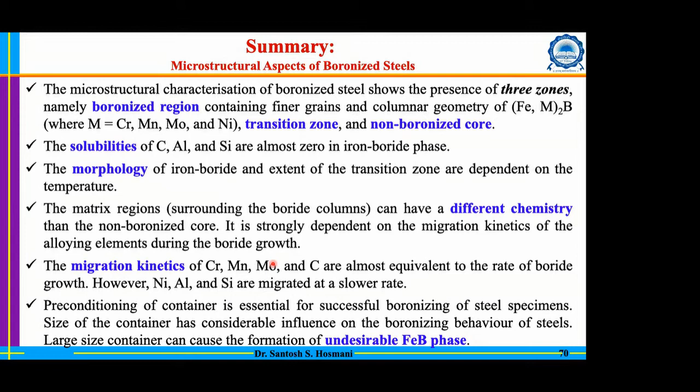So that is better to avoid as much as possible. With respect to properties, extremely good hardness can be achieved. Depending upon the proportion of ferrite in the matrix, hardness can be as low as 1200, even as high as 2000 HV.

Even non-ferrous materials can give you borides, and can give even further higher hardness. Superior erosion and abrasion wear resistance has been observed, and galling resistance is also extremely good. Deterioration of this boride is quite low even at high temperature, due to good oxidation resistance, and the corrosion resistance at ambient environment, especially in alkaline and acidic media, is also extremely good, based on our work as well as the literature.

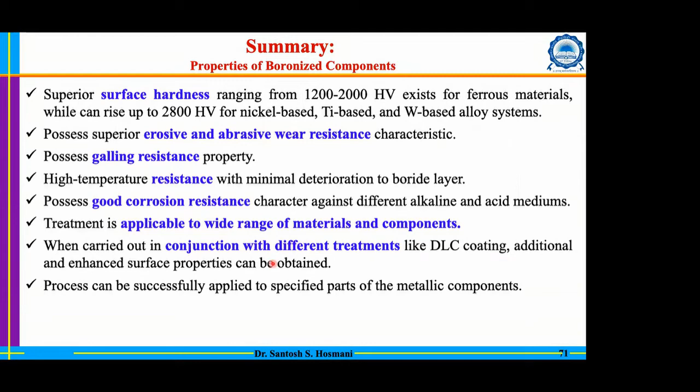A wide range of materials can be boronized using this technique. DLC will be quite useful to overcome some of the disadvantages associated with boronizing. So that is the summary. There is plenty of literature available on this, so there is always more to explore. Thank you.

Thank you very much, doctor. Any questions? We can take a few, though it is a bit late, but we can still take some. I would like to ask a question, if I may.

We have just heard that boronizing gives so much advantage to steel. Then why is it that it is a fairly old technique? It's not something that got discovered recently. So why is it not very popular?

I am not really sure about this. Probably with the pack system, consistency of results could have been an issue in early days. Nowadays, people have come up with ready-made mixtures, which were not available earlier. For example, the German powder I mentioned initially, Ekabor, gives a promising composition, claiming very consistent results. Probably consistency of results is one reason. Another reason could be that the gaseous system was not really extensively studied.

Unfortunately, in the case of boronizing, limited information is available. However, for nitriding, gaseous or plasma-based systems are well established and easy to operate. Also, nitriding can be done at lower temperature, even less than 600, which is possible. But in boronizing, we have an issue, especially with the reactions happening for boride formation. So that is another disadvantage compared to nitriding.